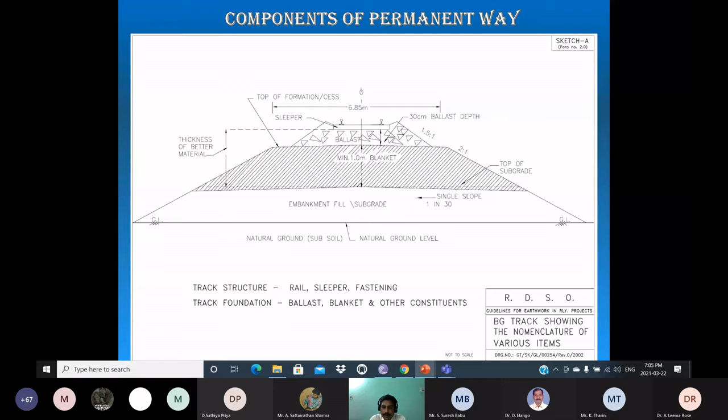Now, as I told you, let us see these components one by one with the help of photographs, which were taken personally by me during my site visits as well as supervision at sites.

Basically, our projects mainly consist of what is called railway doubling. That means there will be a single track running from one city to another, and over a period of time, as demand increases for passenger as well as freight transport, the capacity of that single railway line will not be sufficient.

So railways will go for augmenting the capacity by constructing another railway line, for which the design and implementation supervision will be given to a consultancy firm, and we are one among the firms doing this type of project for Indian Railways.

Usually, the second track, that is the double track, will be provided almost parallel to the existing single railway track, in order to avoid a higher cost for the project.

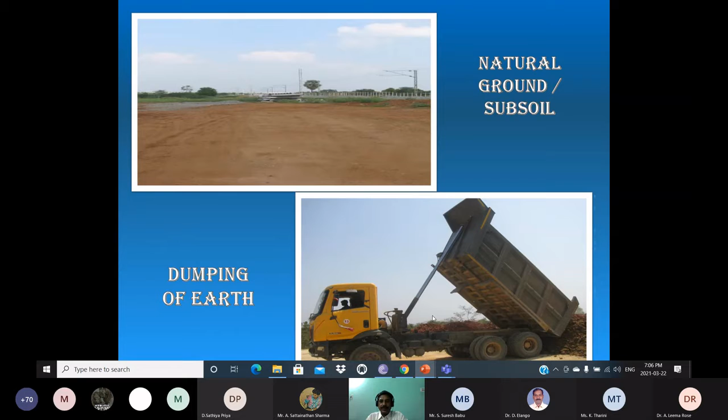In this natural ground, earth will be dumped initially, then spread and rolled. You might have seen this in highway construction too, when traveling a long route where widening activities are going on. Hope everybody would have come across these activities and had a glimpse of it.

Now I am going to explain the technical details of it. In embankment construction, earth is dumped and each layer is graded and spread out to a thickness of 25 to 30 centimeters, called the loose thickness. When that layer is compacted and consolidated by sprinkling water, it comes to a thickness of 20 to 25 centimeters. That is the convention used for embankment construction.

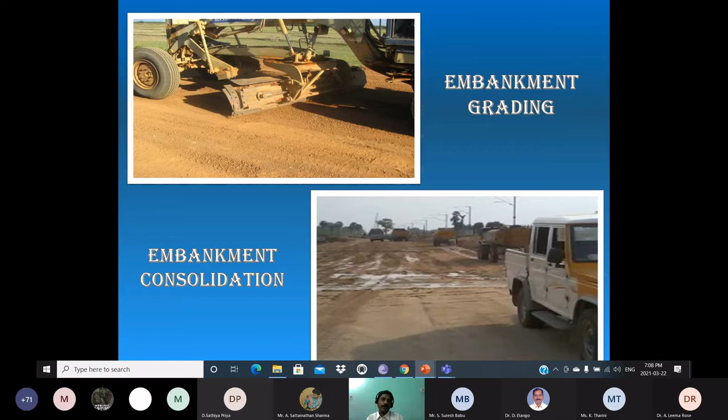So embankment construction will not be done in full thickness at once. It will be constructed in layers of a maximum of 25 centimeter thickness. Hope you are clear.

Now we have seen subsoil and subgrade. The top layer of the subgrade looks like this, and you can see the running main line going here, with a fence provided, and we are going to construct the second line, the doubling of the railway track, at this location. This is the top of the subgrade, and as I told already, in railways we provide a special type of material called blanket.

The blanket is also nothing but an earth material, but it has to pass special specifications like percentage of plastic fines and non-plastic fines, coefficient of curvature, coefficient of uniformity, and other criteria, which I have in a table that I will show at the end of the presentation.

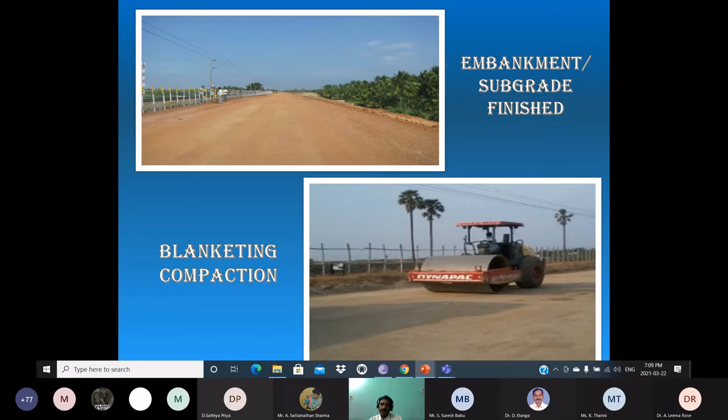If a material passes these conditions and criteria, it will be chosen for providing the blanket. If that material is not available in the vicinity of the construction site, it will be produced artificially using a pug mill. This blanket material is important as far as railway embankment is concerned.

Now in the cross section we have seen subsoil, subgrade, blanket, and over the blanket we have seen ballast. Before ballast is spread on the embankment over the top of the blanket, it has to be stacked and then measured for making payment. Usually the ballast will be stacked in the shape of a trapezoidal shape, and with the help of a tape it will be measured. Several formulas are there to calculate the volume of the trapezoidal shape, and using such formulas the volume of the material will be calculated, and payment will be made for procuring this material.

This is a stone ballast. Once the measurement is completed, this ballast will be trailed out and then placed on the embankment. It will be spread on the embankment and rolled for an initial thickness of 30 centimeters.

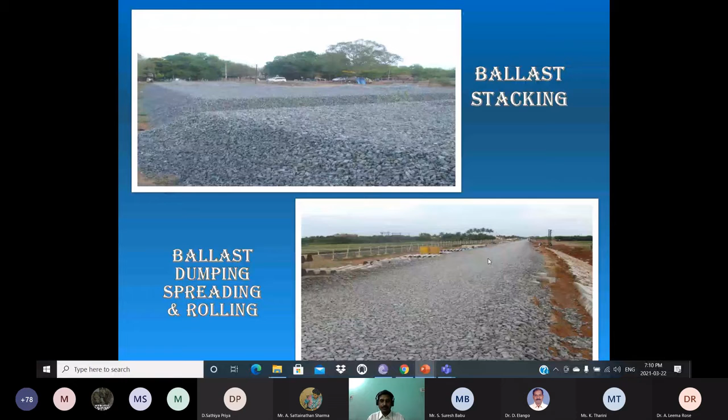Next comes the sleeper, which I have already shown in the cross section. Over the ballast, the sleeper will be laid, and the sleeper will be initially stacked at the side of the track, that is construction site, in layers perpendicular to each other, and each layer will have about 8 sleepers. The purpose of keeping 8 numbers is that the conventional crane that is lifting the sleeper will have capacity to lift 8 sleepers at a time. So for that purpose, these sleepers are stacked in 8 numbers in each layer.

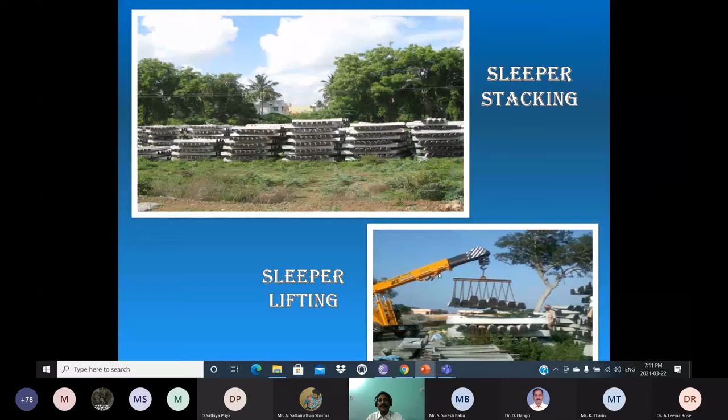Once the sleepers are lifted, you can see here, this is a gantry crane which is used for placing the sleepers on the ballast, over the ballast. Now the sleeper spacing is about 60 centimeter center to center, and this machine helps to place a sleeper in a rapid way. Otherwise, if you go for manual placing, it will take a long time.

Once the sleepers are placed, then you might have seen, in order to have a cushion effect to the rail, material called GRP, that is grooved rubber pad, will be placed between these 2 parts. This is called MCI, which is malleable cast iron. This malleable cast iron insert will be monolithically constructed while casting the sleeper in the factory, and between these 2 inserts the grooved rubber pad will be placed, and over the grooved rubber pad only the rail will be placed from here to here.

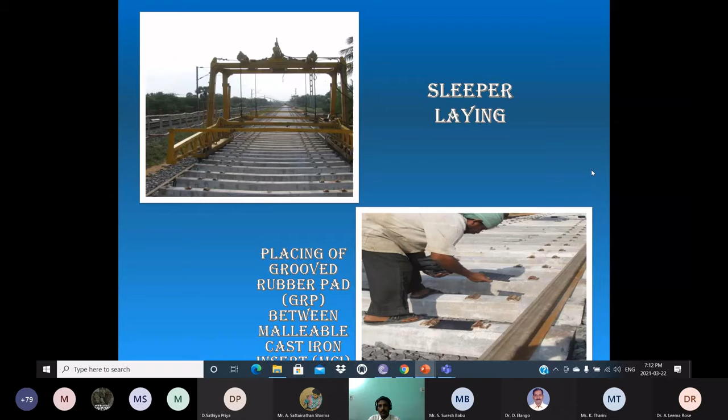Now after this laying of sleepers and adjusting the sleepers for its center to center distance of 60 centimeter, this machine is called a rail threading machine, which is used to pull the track and then keep the track on the sleeper. Nowadays it is done manually also, but when the machine is used, the precision will be accurate, and we can do the work fast, in a rapid manner.

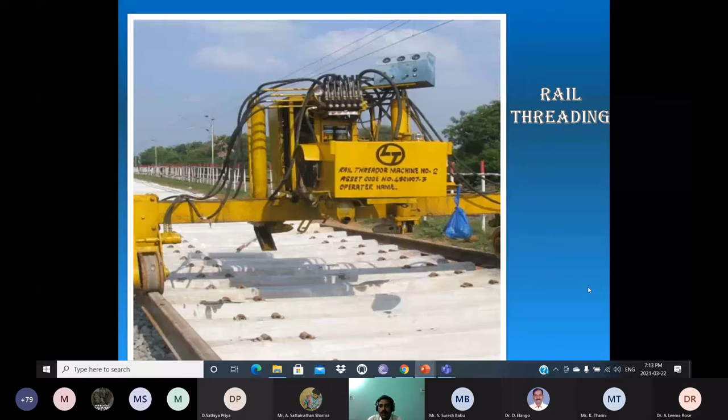Now, after placing the rail over the sleeper, between the MCI inserts, there are two fastenings that are used to hold the rail with the sleeper. One is called elastic clip, otherwise called ERC or Pandrol clip. The other one is called a metal liner. At some places metal liner will be used, and at some other places where track circuiting is done, a special type of liner called a GFN liner will be used. GFN stands for glass filled nylon liner, that is GFN liner, used in the track circuiting area.

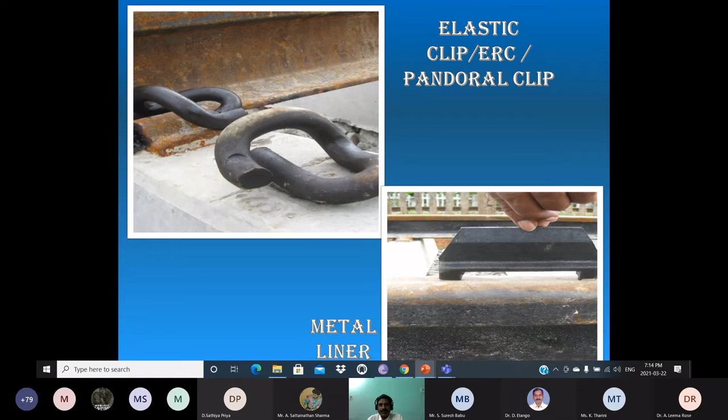Now let us see how this is used to fit the railway track to the sleeper. This railway track is an I section where you have a lower flange and the rail head. Initially the metal liner will be placed loosely on top of the lower flange of the rail, and this is the ERC clip, that is Pandrol clip or elastic clip, and one end of this ERC clip will be driven into the MCI insert. As it is hammered from the side, it will go in at one end, and parallelly this arm of the ERC clip will apply pressure to the metal liner, and in turn this metal liner will apply pressure to the lower flange of the rail to hold the rail in its position.

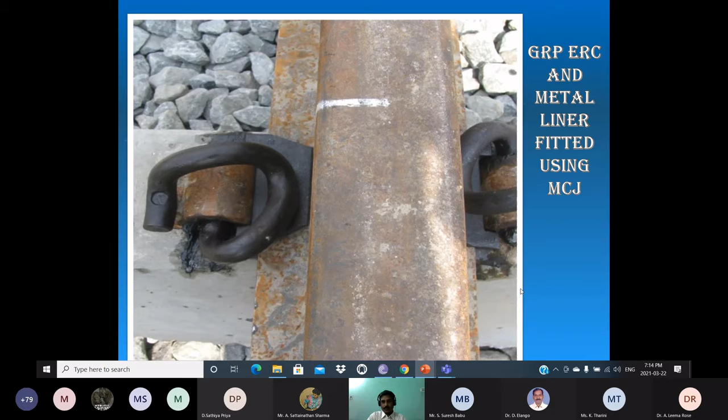Now let us see how the rails are joined. The standard rail length is only 13 meters, and if you have to go from Chennai to Trichy, it is around 450 kilometers. So each 13-meter rail has to be connected, because the factory produces output only in 13-meter lengths. So to connect two rails...

Conventionally, this is not a modern practice, fish plates and fish bolts are used. A fish plate is a rail section which fits into the web portion of the rail, connecting the two rails at the joint, where there is also a gap. Fish bolts and nuts are put to connect these two rails. But this is an outdated technology, because it is the weakest section of the railway track, and when the train runs, these bolts and nuts get loosened, causing maintenance problems.

So nowadays railways have gone for rail welding. In rail welding, they connect the two rails by means of welding technology, which we will see in the next slide.

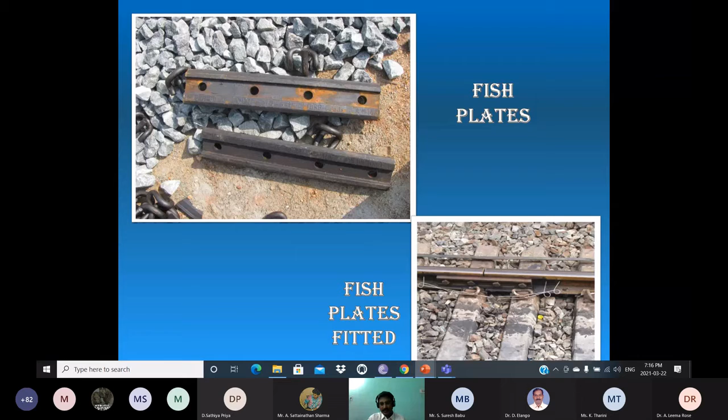When we talk about rail welding, there are several types, but two types are predominantly used: flash butt welding and aluminothermic welding. As the name indicates, flash butt welding involves bringing the two ends of the rail together and butting them with a pressure of 35 to 37 tons.

This is done using a flash butt welding machine. When it is butted like this, the machine will lower and apply heat to the extent of 1000 to 1500 degrees centigrade. Thereby the ends of the two rails get melted, and when cooled, the two rails are joined with a flash butt welded connection.

Here the main advantage is that the material used for welding is the original rail material available in the other part of the railway track. This is predominantly used and is the strongest type of welding used in railway construction practice. But the deficiency is it requires huge and costly machinery, and the availability of such machinery is very limited — only the railway provides that type of machinery.

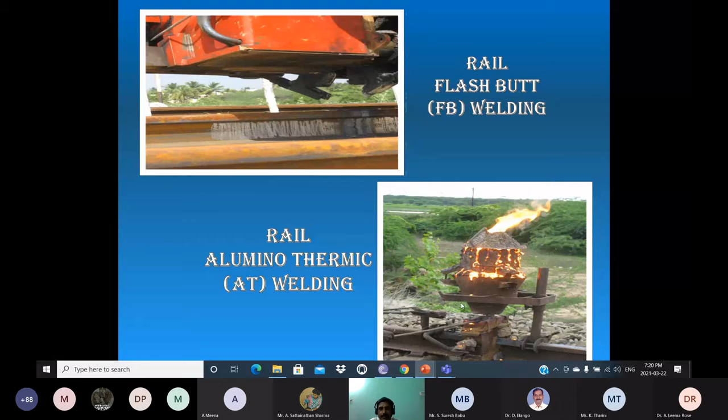That is how aluminothermic welding is carried out. Naturally, when we compare these two types of welds, flash butt welding provides a strong weld, whereas aluminothermic welding provides a weaker weld. But for emergency purposes, we go for AT welding when the machinery is not available. Hope it is clear.

Now let us go to the interesting part. This is called ballast packing machine. Now initially we have put 30 centimeter thickness ballast, over which we have laid the sleepers. But that may not be sufficient, because at some locations the natural ground may not be strong, so the cushion effect needs to be increased.

The second thing is, finally we have to check for the design criteria, like the level of the rail, the level of the sleeper, level of the ballast, level of the embankment, and all that. So in order to check the design profile as well as ensure the gradient of the railway track, this particular machine is used, called ballast packing machine, and the main component fitted to this machine is called ballast packing equipment, which is shown here in this photograph.

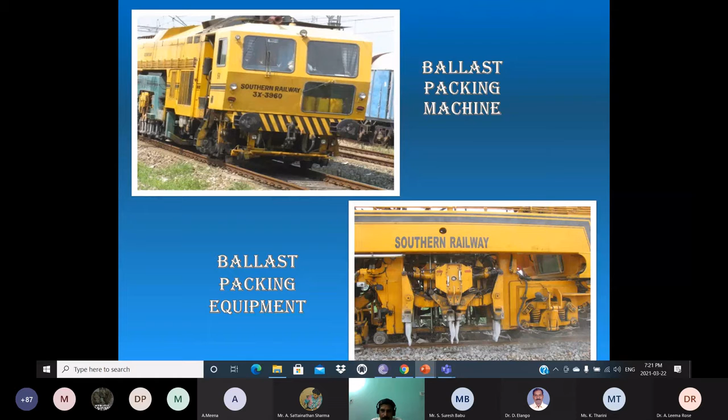Now I am going to show a video of how this ballast packing is done on the railway track in practice, and it will be very interesting to watch. Kindly watch this video patiently for a minute. It will not go beyond 1 or 2 minutes.

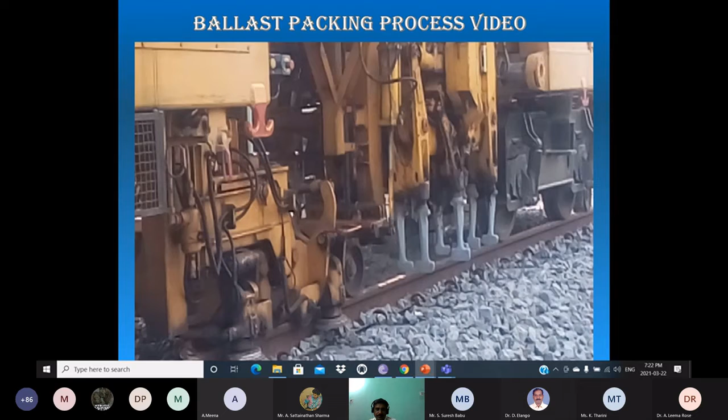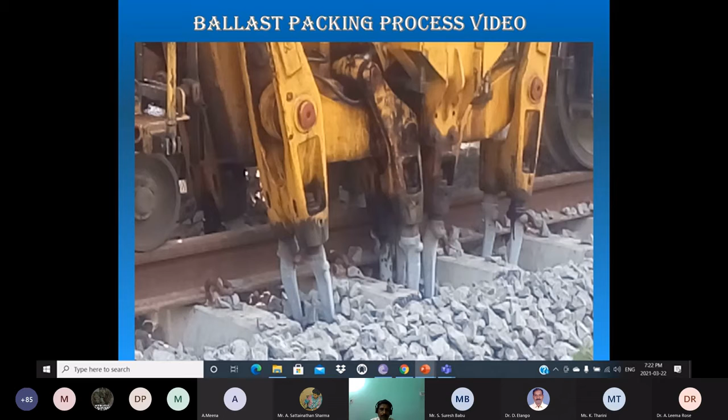See, one arm of this machine will lift the rail, and these arms will pack the ballast below the sleeper, so that the level of the sleeper and level of the rail is maintained as per the design.

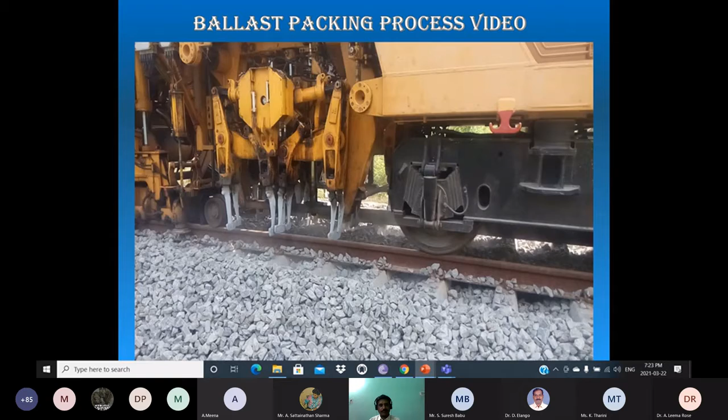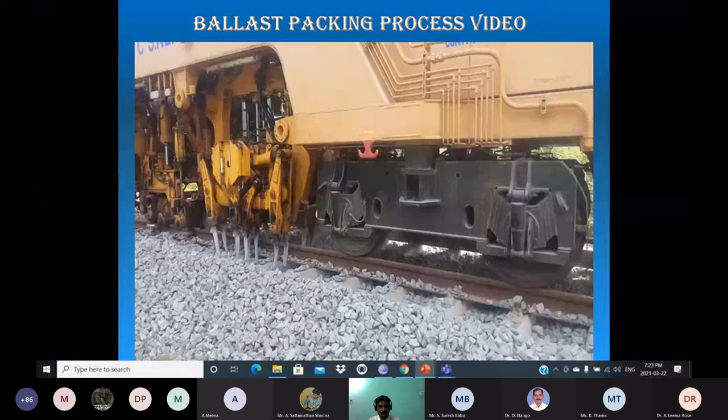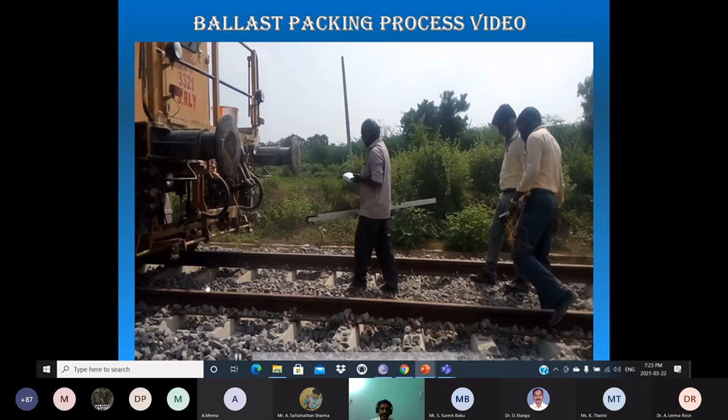This person is carrying a meter called gauge meter, and as the machine goes, he will place this in the track and check the gauge. The gauge width of a broad gauge in Indian Railway is 1.676 meter. You can see here he is taking the gauge.

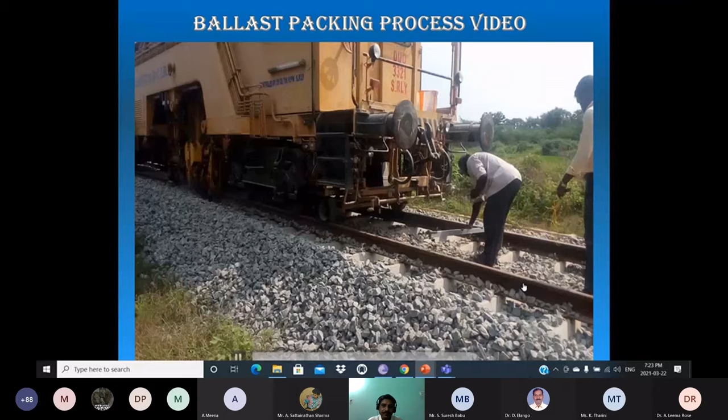So hope you have enjoyed this video. Now once this ballast packing machine runs on the track, the civil engineering portion of the railway track construction is complete, and by operating this ballast packing machine, we will attain the exact design features. Based on the design, we will attain the required level of the rail, required gradient, and all the design specifications of the particular track will be achieved. So this is the completed track.

Now there is another interesting feature. We have seen this ballasted track, ballast packing and all that, but in modern railway construction, though it is costlier, at some locations railways are adopting ballastless track, especially inside tunnels and elevated tracks, especially in metro rails. Ballastless track is being used because ballasted track gives a lot of maintenance issues. So ballastless track is used at some important locations because it is costlier compared to ballasted track.

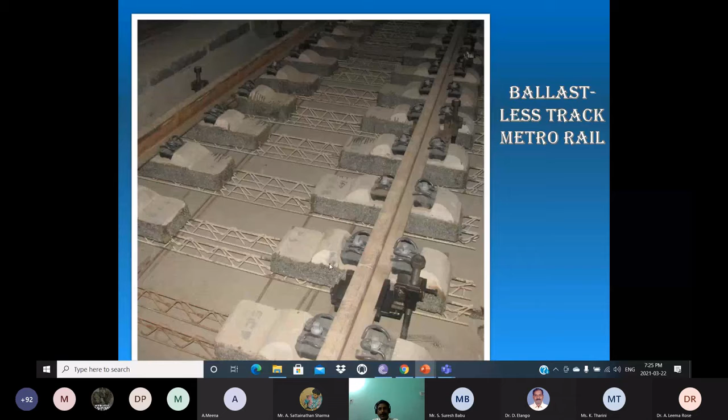Now ballastless track is nothing but a thick concrete medium constructed monolithically with the sleeper, and when that concrete bed is placed below the track, it will itself act as a shock absorber. That is, it will function as a ballast, take the load from the train and distribute it to the natural ground below. So that is the purpose of a ballastless track, and it is maintenance free; we need not replace or screen the ballast once in a while.

Now let us get into some of the other components that we will come across in railway track. One such component is a curve, and you might have read about curve design in highway engineering also. A curve is mainly used to change the direction of movement of the train. We have several design parameters for curves, such as length of the curve, degree of curve, radius of curve, transition length of the curve, and super elevation of the curve.

All those things will be designed beforehand, and then implemented at the site. And for each curve, a board will be kept by the side of the track, and all these technical specifications will be written on it.

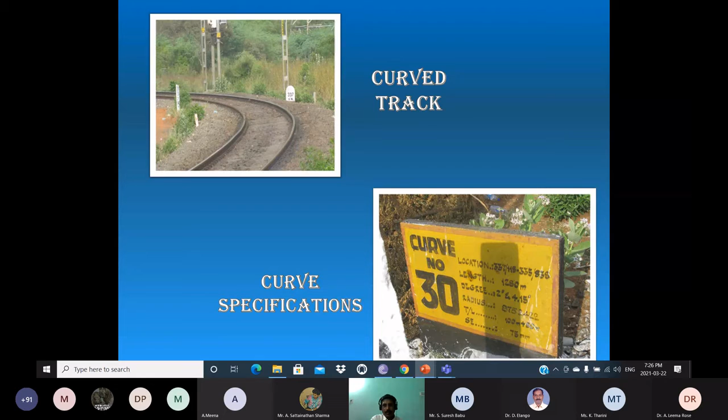Then level crossing is another component of railway track, where the road meets the rail. That portion is called a level crossing, and basically there are two major types: unmanned level crossing and manned level crossing. In the manned level crossing, there will be a gatekeeper, and he will get instructions from the station master of the nearby station. When the train is coming, as is the usual procedure, he closes the gate, and when the train goes off, he opens it.

Whereas the unmanned level crossing is a risky proposition, where the road user is responsible for managing his safety, and the railway is not responsible for accidents occurring there, because the road user has to wait, and several precautionary instruction boards will be kept.

But the responsibility of safety lies with the road user. So the road user has to stop and see whether there is no train, and only then cross the track. But in spite of that, a lot of accidents are happening, especially at unmanned level crossings in the rural areas.

So now the railway has come out with a broad scheme, a mega scheme, to replace all the unmanned level crossings, especially in the southern part of India, with either a grade separator or a manned level crossing, depending upon a factor called train vehicle unit. Train vehicle unit is abbreviated as TVU. The number of vehicles moving during the peak hour multiplied by the number of trains passing through the track gives the train vehicle units.

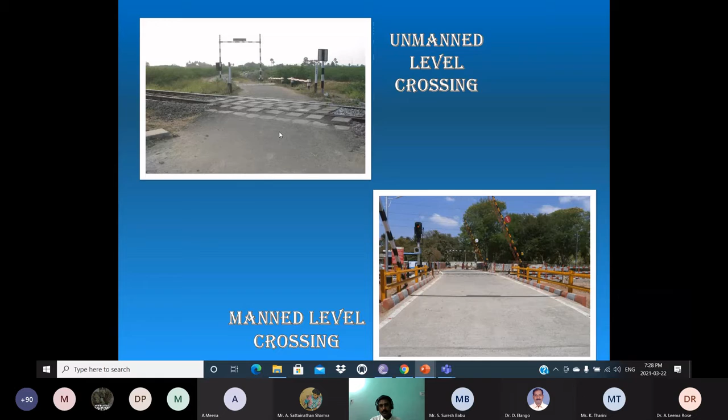Now, points and crossing is another important component of a railway track, which is used to change over from one track to another track. There are two terms: facing points and crossing, and trailing points and crossing. Here you can see the diversion of one track to the other starts. This portion is called the point; in other words, it is called a switch. This switch is part of a points and crossing. And this area is called the crossing, where you can see a diamond shape like this.

When you go on the track, if you want to go straight, the position of the switch will be like this. Then the wheel flange will take up this rail and it will go straight. When the train has to go in this curve, this switch will be released and allowed to lock inside this rail, and the train will take up this curved track.

So when we go in this direction, when we first encounter the point and then the crossing, it is called a facing points and crossing. And when we move in the reverse direction, when we come across the crossing first and then the point, it is called a trailing points and crossings.

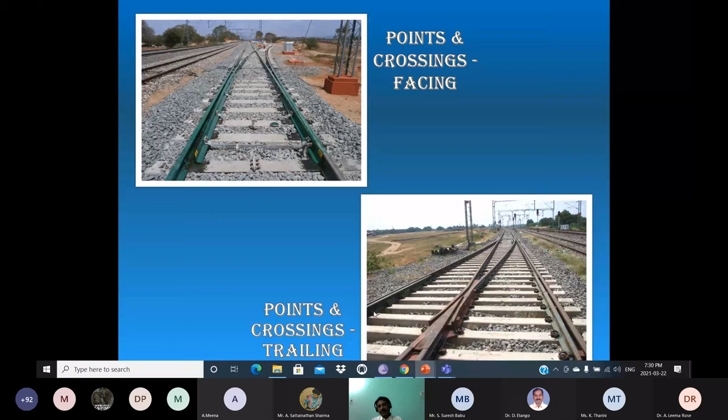And switch expansion joint is yet another important component in the railway track. Since we have already discussed rail welding, nowadays the 13-meter rails are getting welded for lengths of more than kilometers. There are two concepts in that: one is long welded rail, the other is continuous welded rail. Long welded rail will go for a maximum length of 1 to 1.5 kilometers, whereas the continuous welded rail will go for more than 10 to 15 kilometers.

But we all know that the rail is a metal, and when it is subjected to high temperature, it will expand. So there should be a provision for the rail to expand and contract, for which this component called switch expansion joint is provided at specific locations in the railway track. Here you can see a gap between these two rails, and the rails are split up longitudinally as well as in cross section. Here you can see a gap, and here also you can see a gap.

So when the temperature increases, this rail will expand and occupy this gap. Similarly, this rail will expand and occupy this gap, and when it is cooled, it will contract. So this component is a provision to allow the expansion and contraction of the rail. And the specification of this SEJ will be written similar to a curve board, on a board by the side of the track.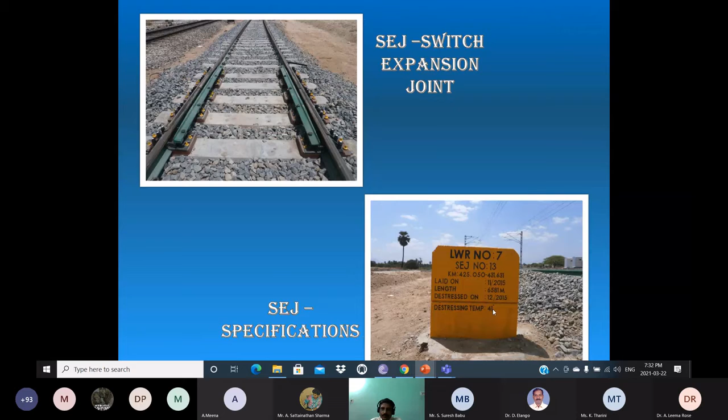And similar to highways, we have bridges as another major component in railway track. The main purpose of a bridge is to provide for cross drainage works. Cross drainage means water has to move from one side of the track to the other side of the track. Basically there are two types of bridges: one is a minor bridge, the other one is a major bridge.

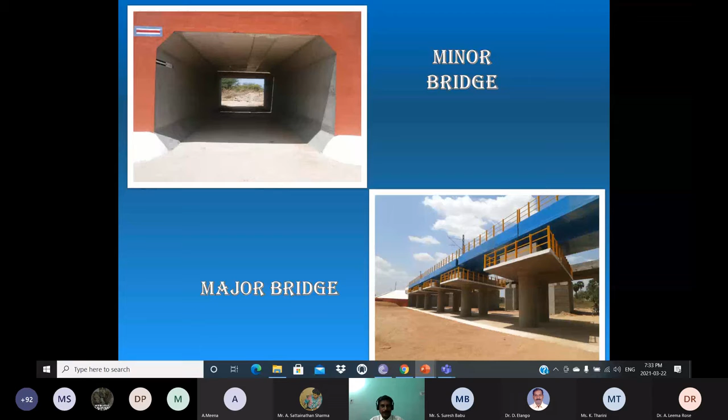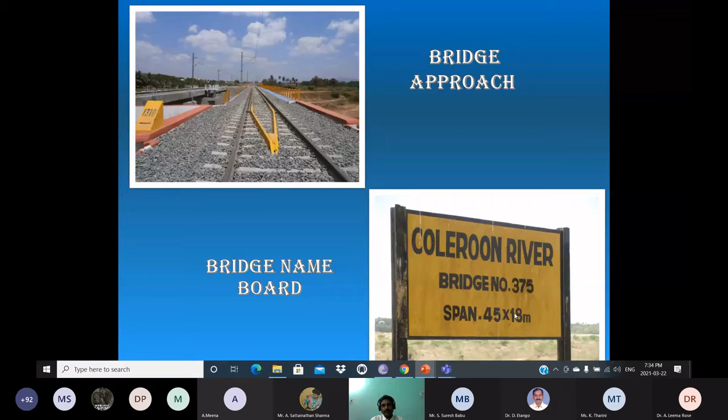And the station building is yet another important component of railway operations, wherein passenger tickets are booked and other passenger facilities are provided in the railway stations. Mainly it is used for collecting the revenue for the railway operations.

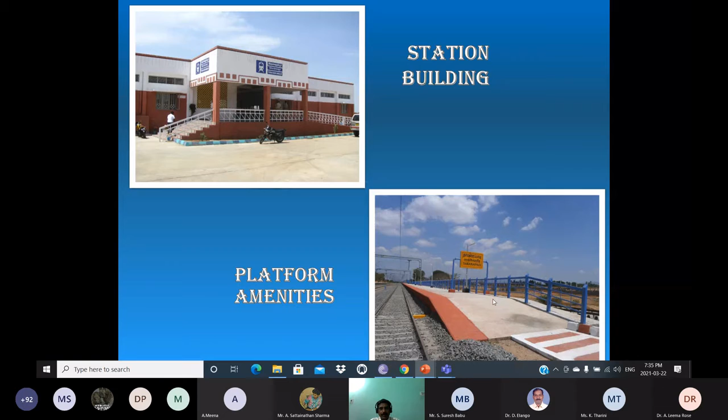On the platform, you might have come across platform amenities like station boards, a fence, benches, drinking water facilities, a cover shade, and all those amenities will be provided on the railway platform.

Now we have almost completed the civil engineering components as well as the main civil engineering track structure. Now let us discuss something about electrical and SNT. Electrification means we are going to provide OHE, which stands for overhead equipment, an electric line over the track so that the train will get power supply from that electrical line and get operated.

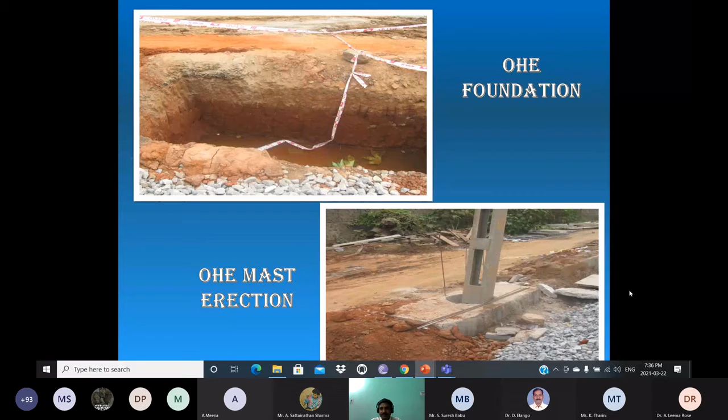Initially, for constructing this overhead electrification, a trench will be dug like this and a platform will be constructed with a cylindrical barrel hole, wherein this high mast used for the overhead electrification will be inserted. Now you can see it very clearly here.

After inserting the mast into that cylindrical hole, it will be grouted and the vertical position will be ensured. Once that is ensured, this is called a bracket. These brackets will be fitted to the mast and the wires will be run across this series of brackets on top of the track, in the center of the track.

Now if you take these two wires, the top wire is called the catenary wire and the bottom wire is called the contact wire. It is called a contact wire because it will come into contact with the train, and it will carry a high voltage of around 25 kilovolt.

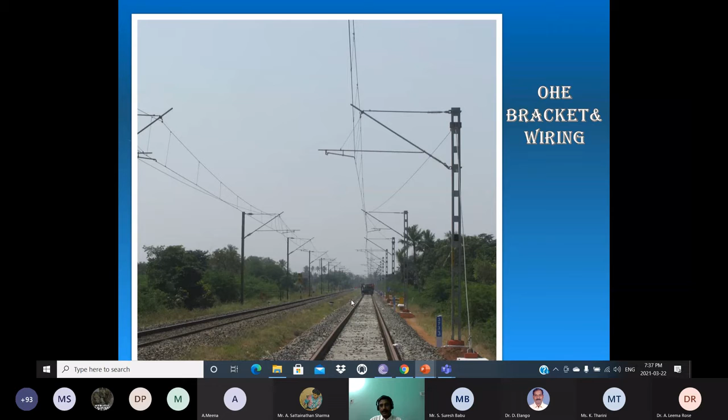If you happen to see the electric engine of the train, you might have seen a triangular shaped component called a pantograph. When the train is starting, it will be raised and come into contact with this wire, and it will run by rubbing this wire throughout its journey. While it is rubbing, the 25 kilovolt power will be supplied to the train's electric engine, and thereby the train operations are carried out.

the SNT control panel. With the help of this panel, the station master will receive the train, and then he will decide which track is free and in which track it has to be allowed. Accordingly, he will allow the train in the particular track, and he has to ensure that there is no train running or stopping in the adjacent block till the next station master's control. And when the track is free, then he will allow the train to leave the station.

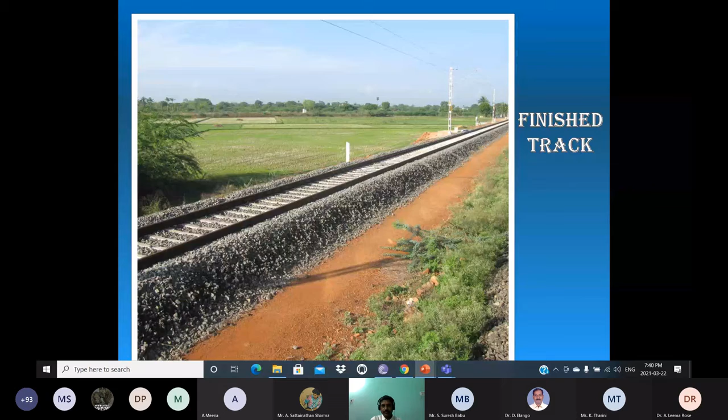And once that speed trial is completed, then he will issue notes, and once the notes are attended and the minor flaws are rectified, then this track will be allowed or opened to public for commissioning. Once all those safety processes are over, then the train will be allowed in the track for public purpose, and that type of track is called a commissioned track.

Now we have seen so many photographs, and I hope you have understood the sequence of construction of a railway track and how many components are involved. Now let us quickly get into a little theoretical aspect, because without it engineering will not be complete. So far in every slide we have seen quality, and we should know as engineers how this quality control process is maintained for railway construction.

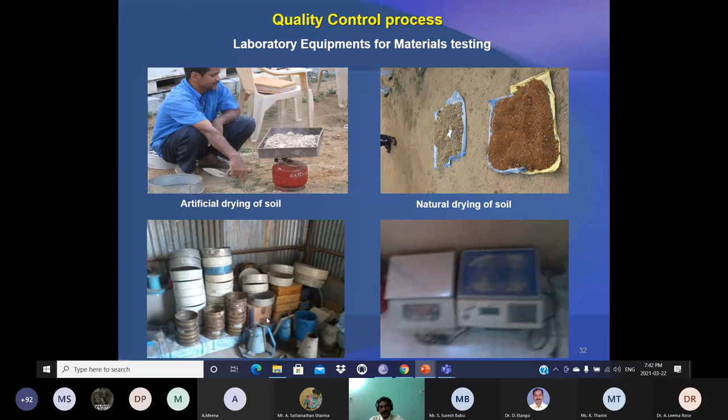So here, this you might have seen in your highway lab also. This is simply drying of borrow earth, which we have used in the embankment and blanket. This will be dried, and then it will be sieved for grading and size. Then a weighing machine is there. You might have seen this in your lab. Then all the Atterberg limits, which we use for soil testing, like liquid limit, plastic limit, and for identifying specific gravity, you will be using a pycnometer. All those things you will be very familiar with. I need not explain.

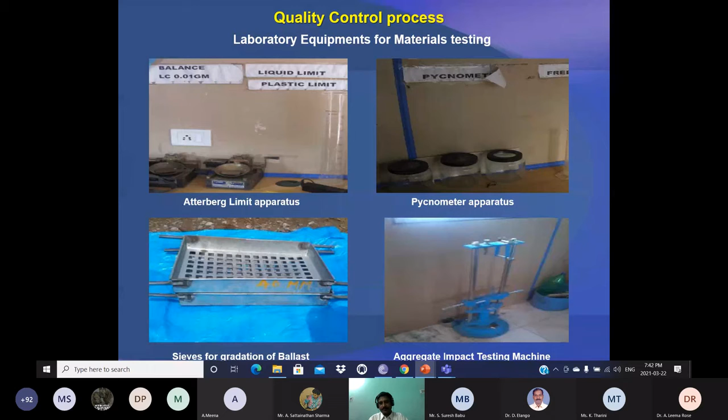Then these are sieves for grading, and this is an impact testing machine to find out the aggregate impact value. Now this one interesting test alone I'll explain, because it is very important to check the compactness of the embankment, which we are doing for every 25 centimeter thickness. So once the 25 centimeter thick embankment, that is one layer of embankment, is compacted, then this cylindrical mold, or core cutter, will be driven in on the top

surface of the layer, and it will be taken out and weighed with the soil specimen, and about 10 grams of the soil specimen will be weighed and then put in this moisture measurement gauge, wherein calcium carbide will be available inside, and with the help of that reaction, a meter will provide the moisture content of the soil available at the site.

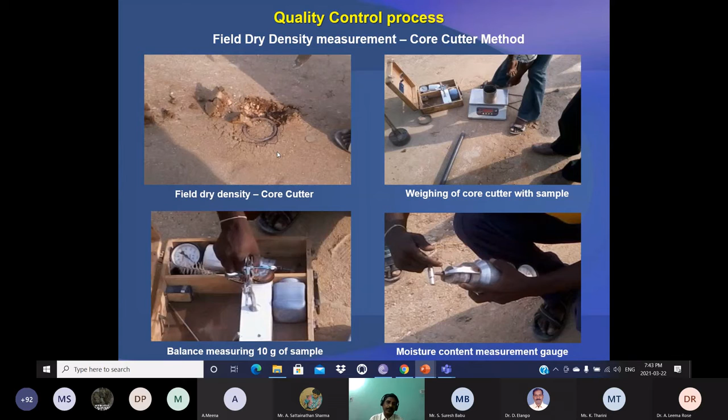Now, let us see from the beginning how this quality control process is carried out. Initially over the subgrade or subsoil, we are putting the embankment, for which we are using borrow material or earth material, and the main purpose of this test is to find out the suitability of the material, and if it is not suitable, then it will be discarded, another quarry will be identified, and then material will be procured. So this borrow material test should be done for every 5,000 cubic meters.

One test, minimum one test for every 5,000 cubic meter in the quarry. If there is a change in strata, and if there is a markable change in the type of soil, then another test will be carried out. Otherwise, for every 5,000 cubic meter, one test will be conducted. The specifications and testing procedure are available in IS 2720 relevant part.

Similarly, for blanket material, this is also tested for suitability. As I told you, this is important material as far as railway embankment is concerned. This material test will be done for every 500 cubic meter volume, minimum one test for every 500 cubic meter. The material has to pass for blanket only if it has non-plastic fines less than 12%, plastic fines less than 5%, uniformity coefficient greater than 4, and coefficient of curvature between 1 and 3. So when a material passes all these specifications, then only it will be selected for blanket material and allowed to be put at the site.

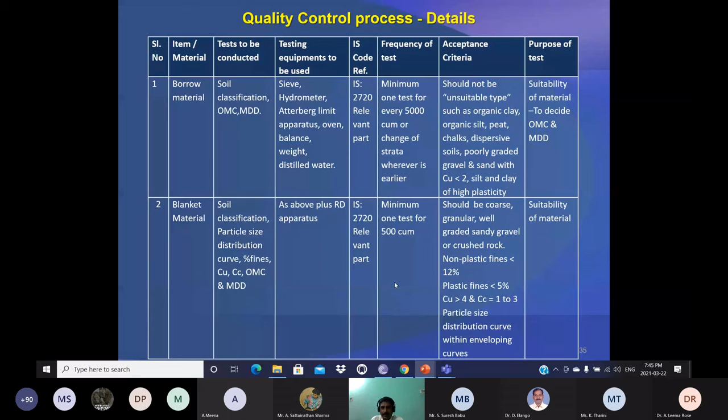Coming to field dry density, as I already explained about the core cutter procedure, we call it FDD, field dry density. For each layer of 25 centimeter on the top layer, over which we are going to provide only ballast, we will be conducting this field dry density test for every 200 square meter area. Whereas in the lower 25 centimeter layers, we will be doing this FDD test for every 500 square meter area.

The acceptance criteria for this test is: before doing this test, we will be doing a maximum dry density test at the lab and arriving at a maximum dry density value. Your field dry density that we are doing at the field using this core cutter method should have a value not less than 98% of the maximum dry density value already found out in the lab. Similarly, the blanket layer also will be tested for field dry density, and for all the layers of blanket, for every 200 square meter area, one test will be conducted. The acceptance criteria is similar to your subgrade only: FDD should not be less than 98% of your maximum dry density.

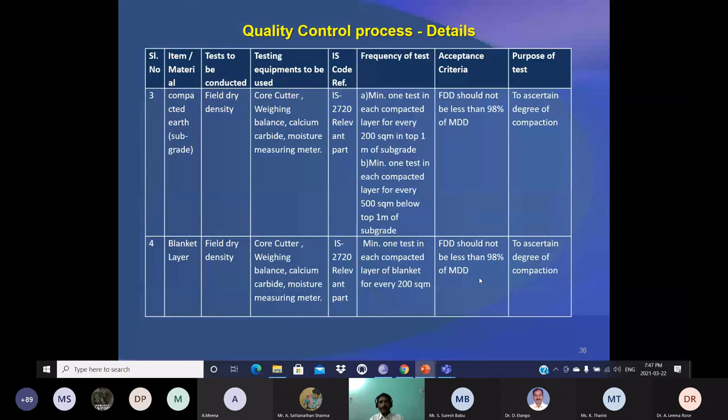Coming to ballast, ballast is a stone aggregate, and you might have done this aggregate test in concrete lab also, and similar tests will be conducted for this ballast. Only thing is, ballast is a big size stone, whereas in your concrete lab you will be testing 3 by 4th inch size stone materials, whereas this will be around 40 mm size. The main tests that will be conducted are size and gradation, abrasion value, impact value, and water absorption test.

With respect to size and gradation, only 5% of the ballast material should be retained on 65 mm, that is 5% should be retained on the 65 mm sieve, and 40 to 60% of the material should be retained on 40 mm sieve, and around 98% of the material should be retained on 20 mm sieve. That means only 2% of the material can be less than 20 mm. That is how the gradation and size of the ballast is ensured.

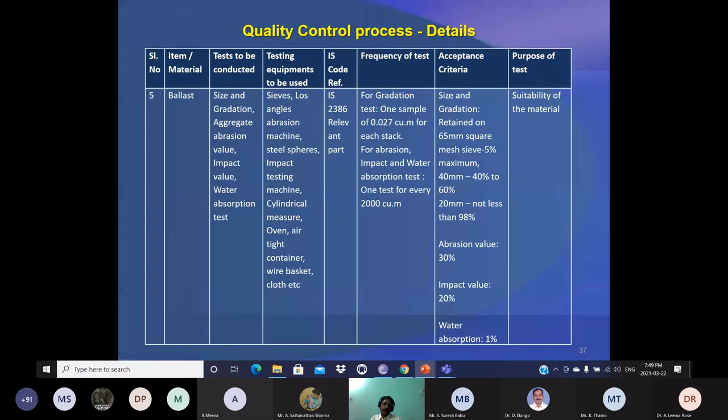Abrasion value should not be greater than 30%, impact value should not be more than 20%, and water absorption should not be more than 1%. If the material satisfies these criteria, then that material will pass for ballast. Otherwise, that entire stack will be rejected and new material will be procured. For your information, railways are very strict about quality control, and the contractors will incur loss if they procure inferior quality materials.

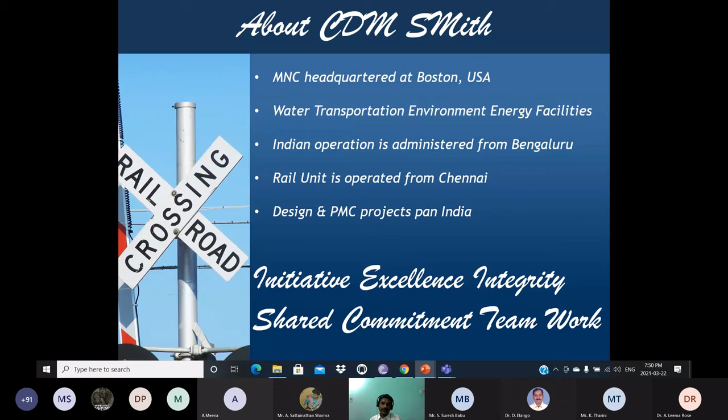While I was introduced, this was already discussed with you.

I have done schooling from Chennai, undergraduation from Annamalai University, and post-graduation and doctorate from Anna University. I have bagged several awards as explained by Ms. Tharini, if I am right. I think with this, I conclude my presentation, and I thank one and all for your patient attention.

Good evening, sir. This is Sattainathan Sharma, working in SRM Valliammai College. Sir, I have a small clarification.

In what way does the ordinary conventional construction procedure differ from the metro train construction? And one more thing, you are talking about concrete sleepers and ballast, and you said there is no need of frequent maintenance. So my question is, how has the durability criteria been addressed? How can we achieve more durability?

So the first question is about metro rail. Usually metro rail is put inside the city where there are space constraints, so we cannot put a railway track inside the city in the conventional way. The only option is either to go underground, or on top of the ground, or overhead. Underground means we have to provide tunneling. If you see Chennai Metro Rail, we have both sections, underground tunneling as well as overhead line.